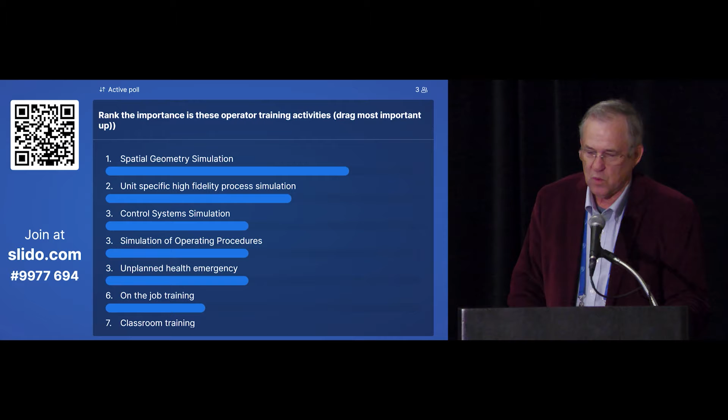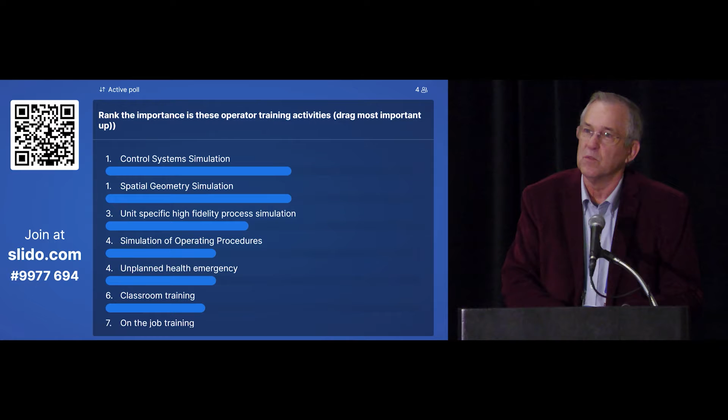In our operator training simulation research work, we kind of broke the simulation types into the simulation of the process, with various levels of fidelity, all right? Anyone that's ever built mathematical models of processes has this rule of thumb: all models are wrong, some are useful, all right? So you can get to very, very high precision. In some cases, that's justified. A lot of the oil refineries and especially brand new process units certainly like to have a high resolution process simulation. But then there's the simulation of the control system.

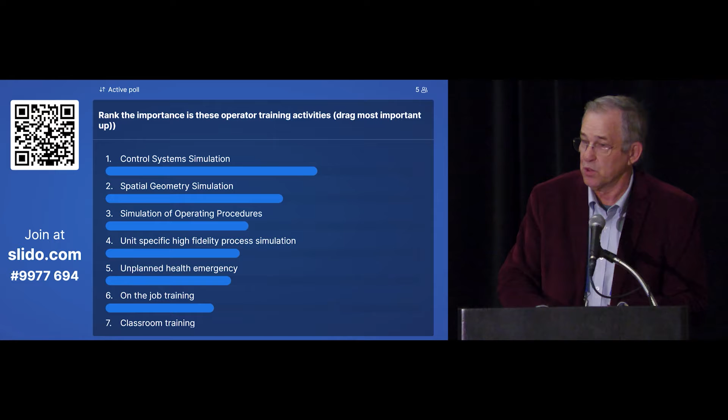You know, in some cases, you could actually connect the actual control system to a simulator. So that's a very precise simulator because it is the same one. Or it could actually be different hardware with exact software running. So it's a replica control system.

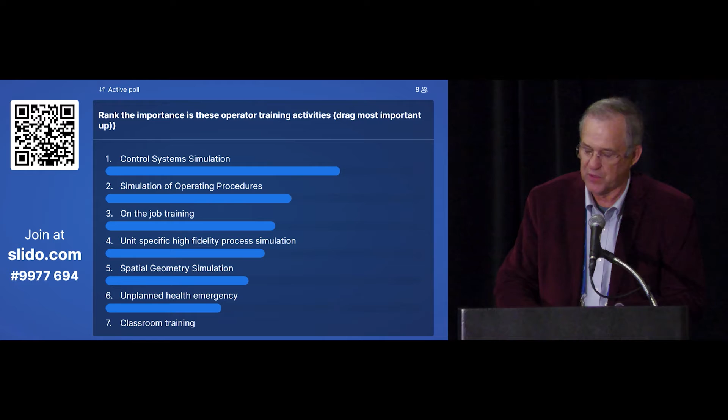And then there is also the simulation of the spatial geometry of the manufacturing plant. All right. And there's some very creative ways that that's done. And in fact, we have some very interesting possibilities of how that's going to work with our esteemed panelists today.

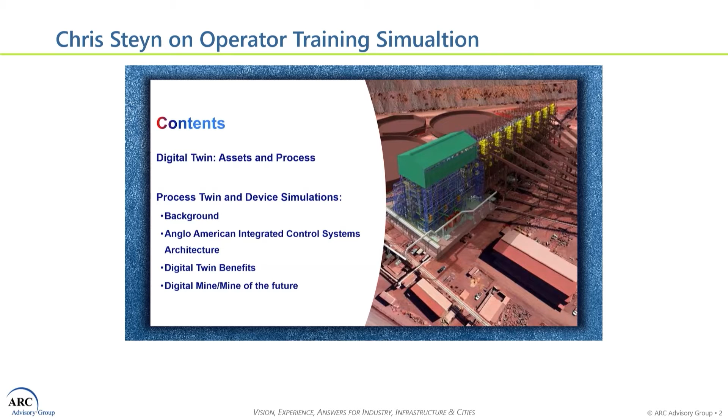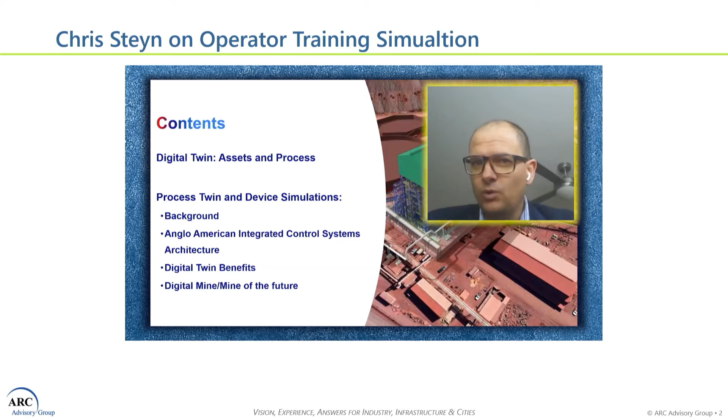So the contents of the presentation: what we'll be doing is just a quick introduction to what we consider digital twin. It is a term that has been thrown around quite often, and it does mean different things for different people. So we just kind of nail that down for what Anglo is all about. Then we'll get into the meat of the presentation. We'll go into the background from an Anglo-American point of view, and then we'll go into the architecture. We'll discuss the benefits of these digital twins, and then we'll just have a quick peek at what's next and what Anglo is really looking for in the future.

Okay, so what is a digital twin? So a digital twin, just in broad terms, if I may read off the slide, it's just an asset that provides a virtual replica capable of simulating all important characteristics of the physical environment. Nothing new to the audience there. In the environment, designers, operators, and engineers can accurately obtain the results of an improvement through simulation. There's absolutely nothing new there.

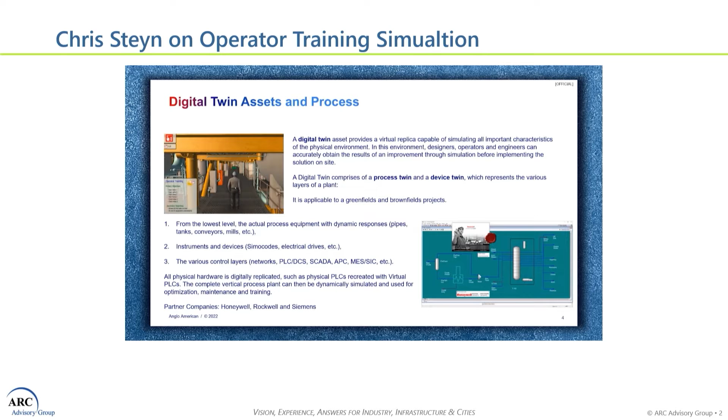However, what I would like to add, for Anglo-American, the digital twin comprises of two things. It's a process twin and it's a device twin. Now, I will be referring to these quite often in the presentation. And we are trying to represent the various layers of the plant's control system hierarchy. And very often we are asked, is this for new plants? No, it is applicable to both greenfields and brownfields projects.

So our digital twin is defined from the lowest level, the actual equipment, the dynamic responses, the pipes, the tanks, the conveyors, the flow rates, the densities. On top of that, we have the instruments and devices, like the SIMOCODEs, the drives, the instrumentation, the actual things in the field. And on top of that, we have our virtual layers, which typically starts with the PLC or the DCS, the SCADAs, the advanced process control, the manufacturing execution systems, or the short interval control, and all the advanced layers on top of it.

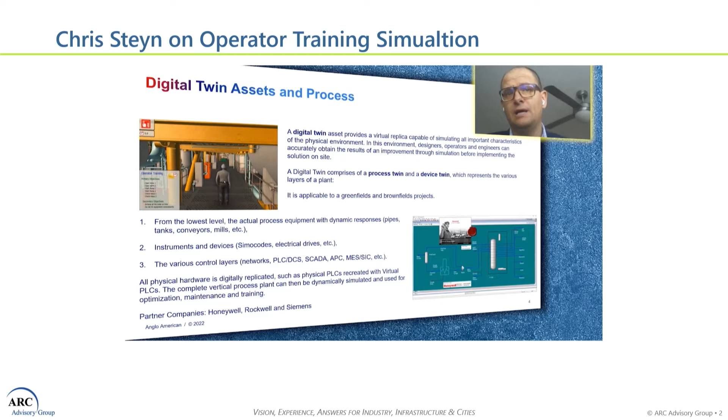All physical hardware is digitally replicated. We'll be talking about that, such as the physical PLCs becomes a virtual PLC, and the actual plant becomes a virtual plant. Our partner company for this is Honeywell. We use Rockwell and Siemens PLCs also fairly widely.

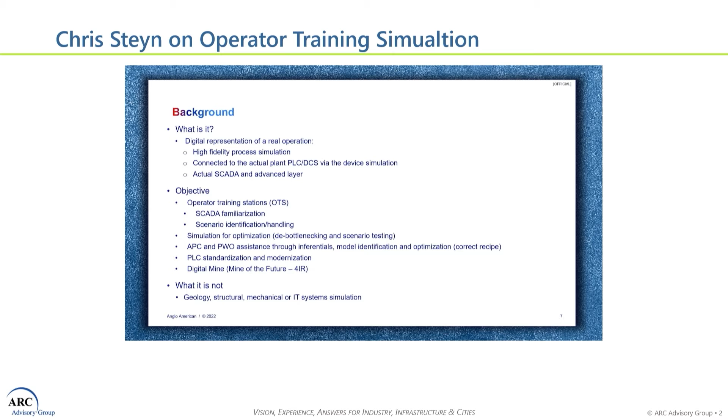Okay, so in terms of the background and getting into the meat of the presentation, there is a bit of repeat here, and we find it fairly useful especially when we are presenting this to our stakeholders on the plant. So what is it? What is a digital twin? It is a digital representation of the real operation, as we've said, but it entails a high fidelity process simulation, which is connected to the PLCs and the DCS via that device simulation.

And then what you have, you can put an operator in front of an actual SCADA that is connected to the actual advanced layer on site. And you can immediately see the benefit that alone will have on any simulation. So the objective is, first of all, to have an operator training station, like I mentioned, putting operators in front of a plant that looks, feels, and reacts as a plant. And it's got the actual control system connected to it for these operators to play with and to fail on that level.

Okay, so that enables SCADA familiarization, scenario identification. In addition, you also have a simulation for optimization, which on its own speaks for itself. It's useful in debottlenecking studies and scenario testing. We've got advanced process control and what we call the plant-wide optimizer. I know in the Honeywell world that's more referred to as the DQP. We have assistance for the advanced layer through the use of inferentials, using the Honeywell design suite, model identification and optimization, running a digital twin in parallel.

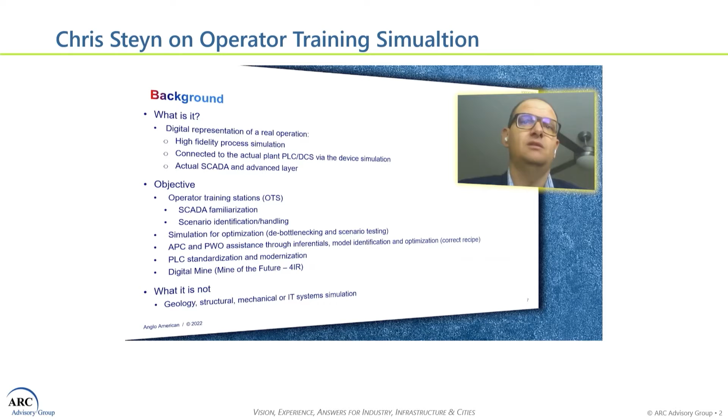What is it not? And it's something we often ask. So it's nothing to do with the geological model of the plant and the feed. It's not structural, it's not mechanical, and it does not include the IT systems infrastructure.

Okay, so Anglo uses an ISA or S88 structure, which is comprised of five levels. Level 0 is the actual plant, mining, the logistics. Level 1 is the instruments, devices, equipment, like I mentioned. Level 2: part of level 2 is the actual PLCs, and the other part is the software, which comprises the sequences, the PID, the control, the base layer control algorithm.

Level 3, which is typically at an execution of between 10 seconds to 30 minutes, is your advanced control. We standardized on the Honeywell Profit software. We still call it Profit. I believe it's moved on to Honeywell Forge. Level 4, we've got plant-wide optimization, where we use the Honeywell DQP for that layer.

Now, on top of that, it's just digital. It's all control layers. It's all in a computer. So part of my job is then to make that physical world bit a digital world. And how do we do it? Just zooming into those couple of layers, we have level 0, which is the actual plant. We use UniSim Design, the UniSim design platform, to create a high fidelity simulation.

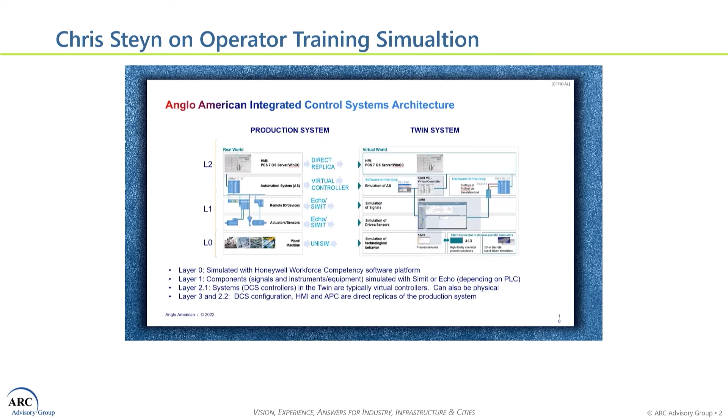The software is a direct replica, and you can immediately see, if you can have a direct replica of the HMI and the actual PLC, you can have a system where you put an operator in front of it and it reacts, and that's connected ultimately to a high fidelity simulation in the Honeywell design platform, reacting like the plant does using the actual control system.

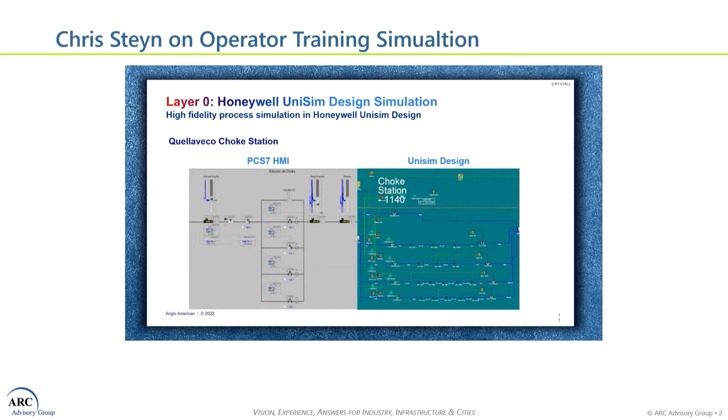Okay, just delving a little bit into these layers. Level 0, as I said, is our high fidelity layer of the plant, the Honeywell UniSim Design. There's an interesting story at Quellaveco. It's a huge copper mine in Peru that's being commissioned at the moment. During the commissioning phase, there was a really good story where we had a look at the choke station, and we could not make this choke station work using UniSim Design.

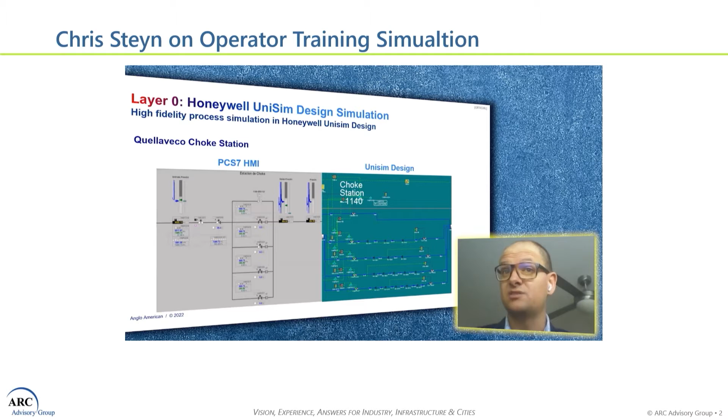And we had the experts in, we had everyone. Ultimately, it was found that the design was flawed, and it caused us to change the design. The OEM came back to us after several heated discussions and admitted that the design was flawed. But it was a great success story for the UniSim Design platform that pointed out, before the plant was built, that there's a fault in the design, which would have caused us quite a lot of downtime during commissioning.

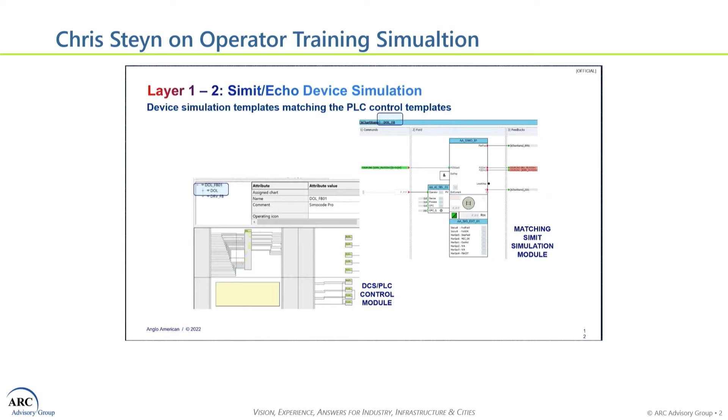Okay, not much to see. Level 1 and 2, it's SIMIT / Echo. It's Rockwell and Siemens software connecting to the PLC. It's just some examples of how it looked. Now let's have a look at the benefit of these systems. Obviously, one of them is you have a dynamic simulation. You can use it for case studies, scenario studies. The example on the screen is where we tested a crusher section.

Again, the benefit I would like to reiterate is that often we do dynamic simulations, but they're not connected to the control system. So in our simulations, the plant doesn't trip because the control system is not there. It doesn't optimize similar to what it would have done. So it's that extra layer of reality that is brought, and we could test various blasting alterations of the mine, control alternatives. We used different configurations of the bins, different crusher settings, and ultimately we decided on a combination of the pre-mentioned strategies, and we went on to implementation based on that.

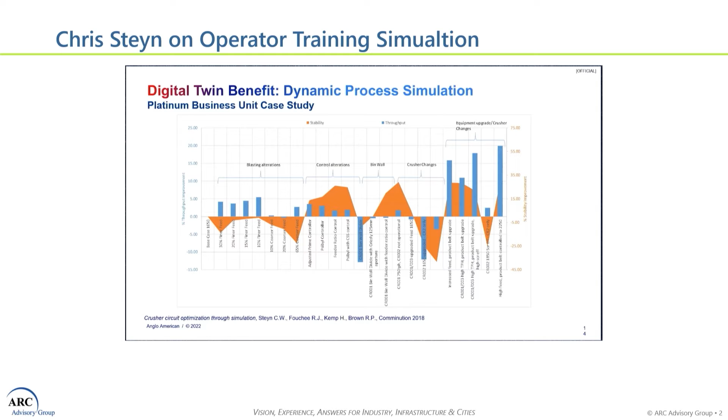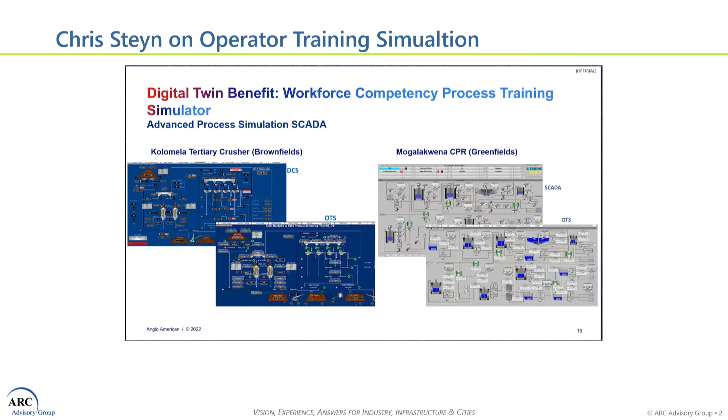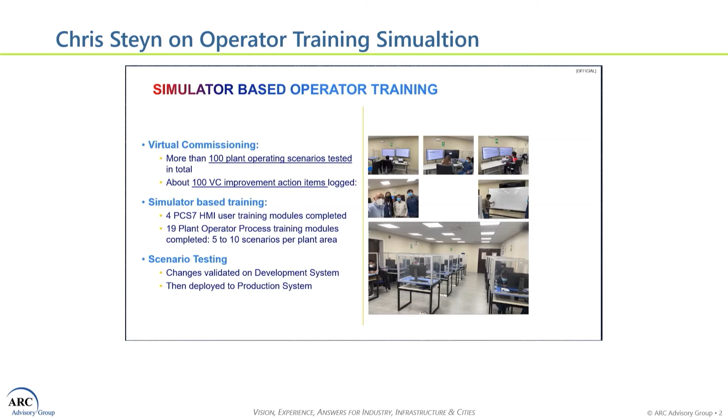Okay, and we also use it for scenario training, where we wanted to teach them how to start up a plant, stop a plant, change a pump, all of those things.

Okay, then just lastly, on the benefits, I just quickly want to go into one of the things we found with virtual commissioning, where we virtually commissioned the plant's control system. Typically at Minas Rio, one of our other plants, we received the code from the vendor, which in this case was a Rockwell vendor. And typically what you'd see, this is nothing against Rockwell, is when we get the factory acceptance test software, we skip a virtual commissioning and training step. We go straight into loop checking, training based on a static SCADA, and ultimately we go into wet commissioning.

However, at Quellaveco, with this entire digital twin, of which Honeywell has got a couple of products featuring, we included a virtual commissioning and training. So before we go to loop checking, we've already done the training on the SCADA. We've done a virtual commissioning of the software, both the PLC and the advanced layer software, and only then do we go into wet commissioning.

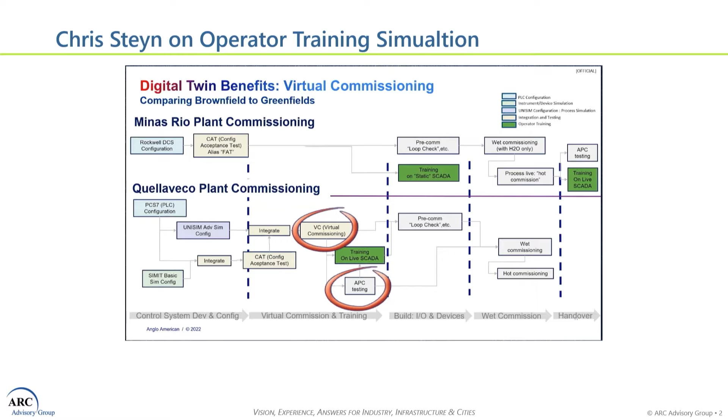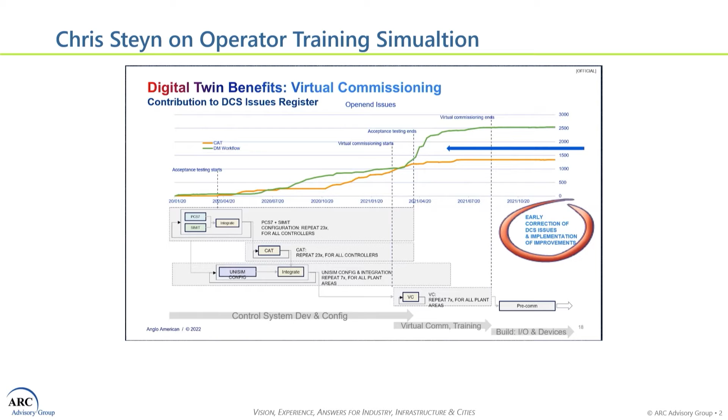However, during a period where there was a virtual commissioning at Quellaveco, but nothing at Minas Rio, the virtual commissioning spotted an additional 1,000 to 1,500 issues with the control system as was delivered to site. So you can imagine having 1,500 issues during wet commissioning that you have to sift through. It just puts an amazing strain on the commissioning process. And obviously what we've seen now is a reduction in the commissioning time, which is something we're really proud of.

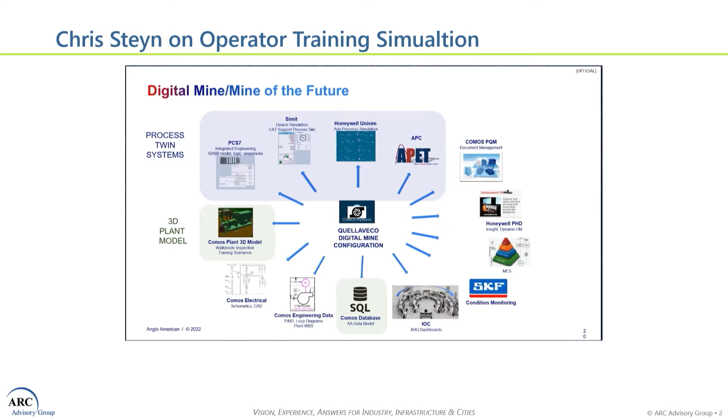Lastly, we're heading towards a digital mine where any piece of equipment, let's for instance say a pump, is connected to a simulation. It's connected to our advanced suite of software. You can get all this information in the virtual world. Then we would like to connect it to a 3D plant, which we're busy doing. We're using a document management software called Comos. It's also another product, but that gives you the electrical drawings, the instrumentation diagrams, and all sorts of information while you are navigating this plant in the digital world.

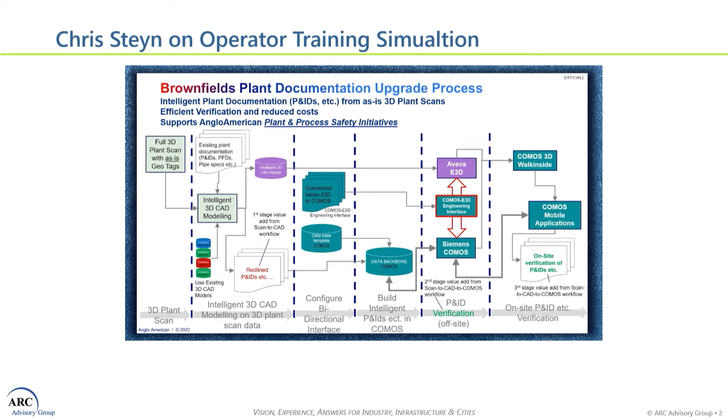That's what we're doing at the moment, doing some 3D plant scanning. From the 3D plant scanning, we suck in the old P&IDs, which in some cases are hand-drawn. It's difficult in those cases, but ultimately using the 3D plant scans that we are taking, we are delivering online P&IDs, red line P&IDs, using these 3D environments. And ultimately, we would like a completely virtual environment where you can walk around and get all the engineering information from our document database.

That's just a little bit on where we're heading, and of this, the Honeywell suite of software does really come into play, where all of this is connected ultimately to a process simulation, which is driven with a high fidelity nature from the UniSim Design environment.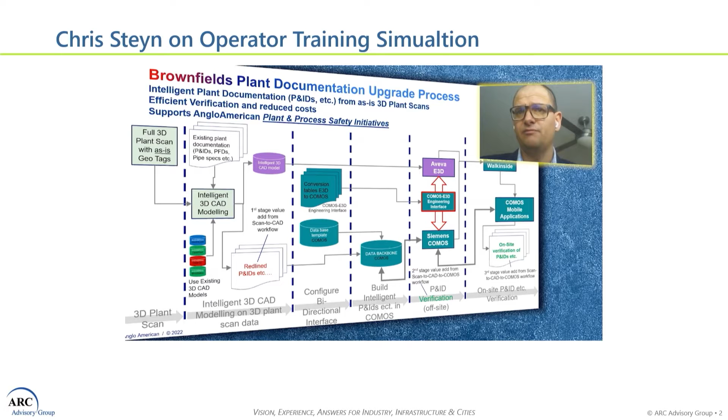Today I'm going to talk a little bit about what BASF is doing to enhance their operator training program, utilizing digitalization. So first I want to talk just a little bit about BASF, give you a little bit of background. So again, I'm from Geismar, Louisiana. We have approximately 1,300 employees with about 1,000 contractors. We have 2,300 acres at our site in Geismar.

Also, the sports arena. BASF plays a big part in the sports arena. From the footwear to the helmets to the turf that everyone walks on, plays on, BASF chemicals plays a big part in all of these. So a little bit about that, about BASF.

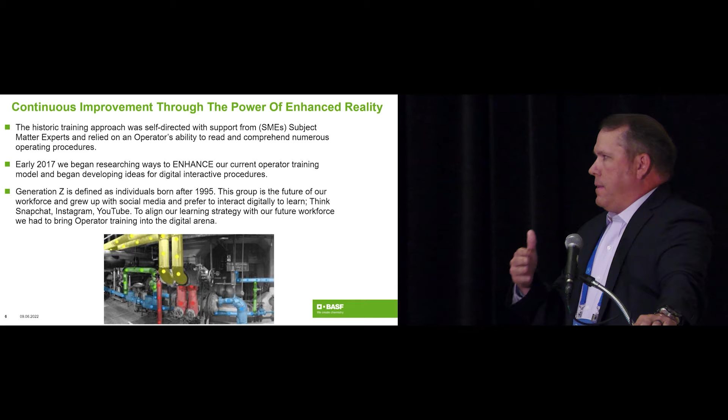So when you go out and buy something, and I've heard this a couple of times during the conference, you never read the manual. The manual's confusing, leaves a lot of interpretation. What do you do? You Google it. You go to YouTube. I do it all the time because it's very specific to what I want to see and do. So again, this is the same principle that we're trying to transition to in the manufacturing community.

Okay, so let's talk a little bit about some of the challenges. These aren't new challenges for the manufacturing community. I mean, these are always top priorities. EHS. What EHS enhancements do we see with bringing in digitalization? How can digitalization tie in with EHS?

Equipment reliability. It's very important that our equipment runs. So how do we train our employees to where they're starting up equipment safely, shutting it down safely, so they're not damaging the equipment, and they're not in harm's way? Process safety compliance, this is big.

Process safety. How do we ensure with our training that operators have the competency? And if they don't have the competency, how are we doing training remediation? So how do we remediate when they're not meeting the competency level that we need? And that's not only on refresher training, but also on initial training. New hire onboarding. So how can we lift our new hire onboarding with digitalization?

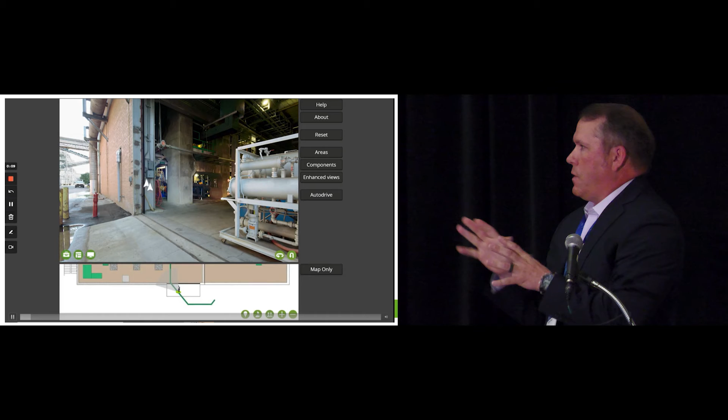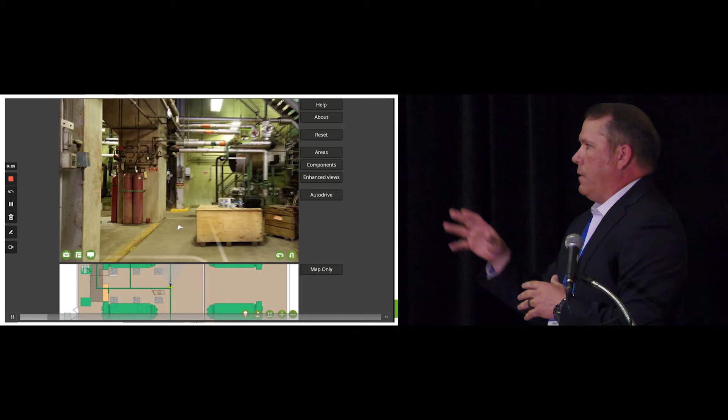Okay, so we're going to look at a little demo here, and we'll run through it. I'm going to talk quick as we walk through it. Okay, so this is the digital replica. This is JPEG pictures that have been stitched together that allows you to smoothly just walk through your process. So as you walk through your process, you can look at the different pieces of equipment. You can look up, you can look down, you can do a 360 look around.

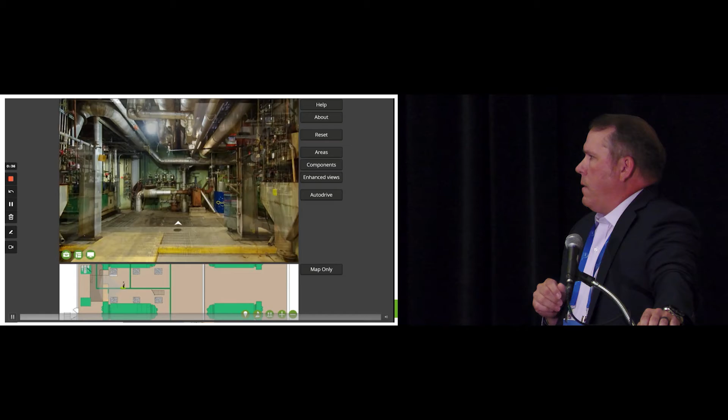Also, once we get into right here, you can see the green boxes. So the green boxes, when you hover over it, it tells you exactly what it is. So then when you click on it, it'll give you a blown up view, and then you can kind of interact with the valve. So this is where Vuvio is unique. You can actually interact with your equipment through the simulation. And again, a lot of the newer operators, this is what they're looking for. This is what they want.

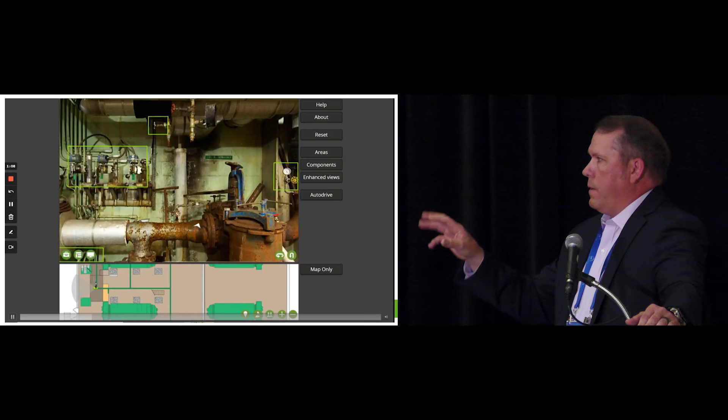And then we also catalog all of our components. So if you want to see a specific component, you can search for it. You can put a generalized verbiage up there. You find it, click on it. It takes you straight to that component. So great piece there.

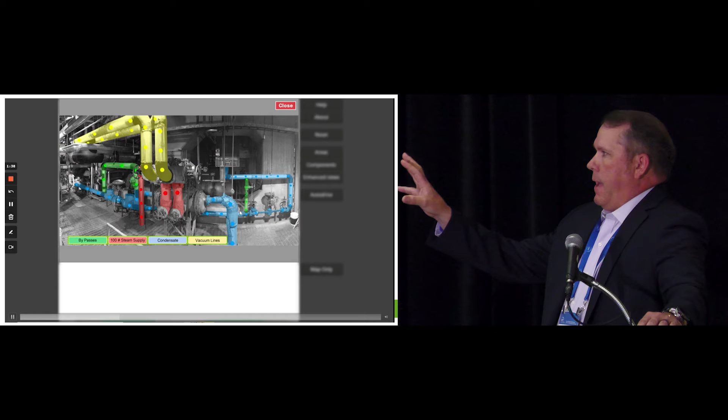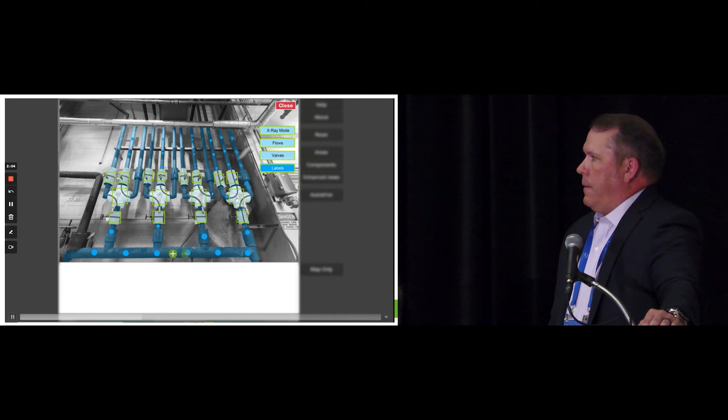So this is some of the enhanced views that I was talking about. So you can see the flows through the pipes. You can start the different flows. This is a more complicated manifold here. So you can see how the valves are activated. You can put labels on them. And then you can practice doing lineups. So if we're trying to get one product to one tank or whatever, we can play with these in the simulation.

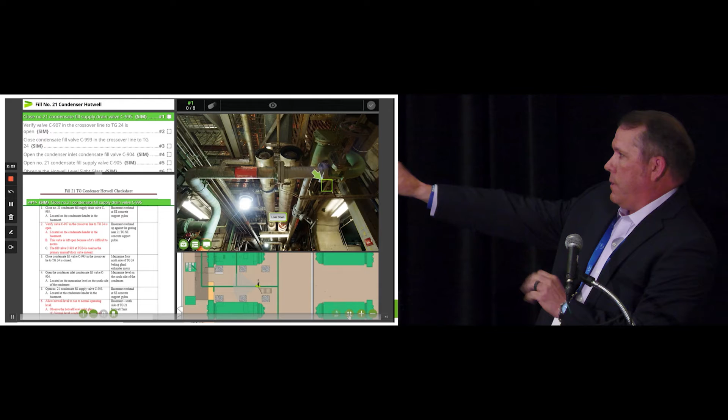All right, so let's go into, so this is the procedure simulator. So if you look, that's the replica on the right. We have a map that's on the bottom. We have our procedure on the left. And then at the top, you can see there's an action checklist. So this action checklist is what we're actually going to go through.

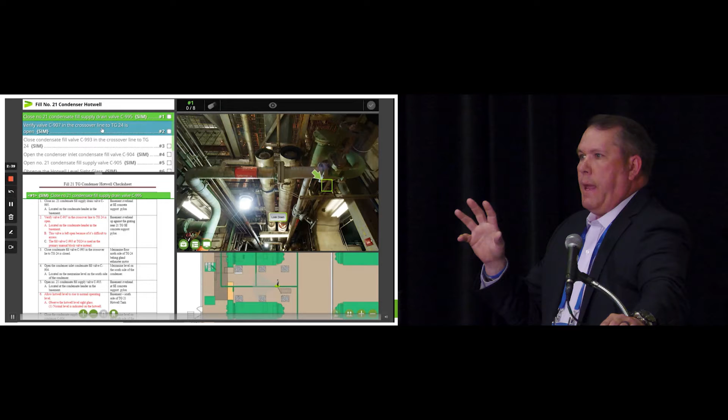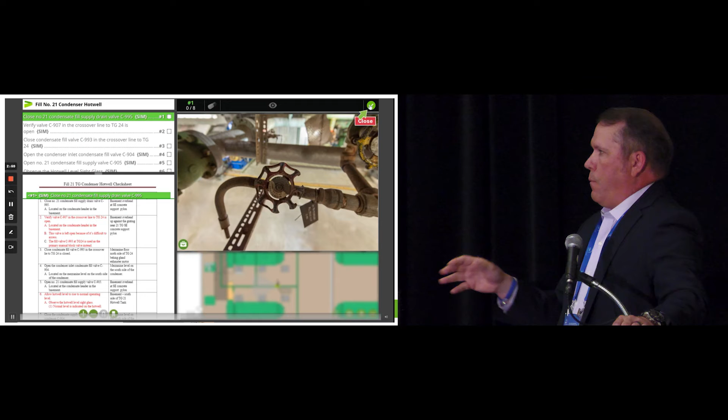So in a procedure, you may have one step in a procedure, but it may have 5 to 10 actions. So we pull those actions out of that procedure and we put them in that action checklist. So it may say, we're going to close all bleeds on the pump. Okay, well, we're going to pull those out. We're going to say we're going to close bleed 1, bleed 2, bleed 3, and so on.

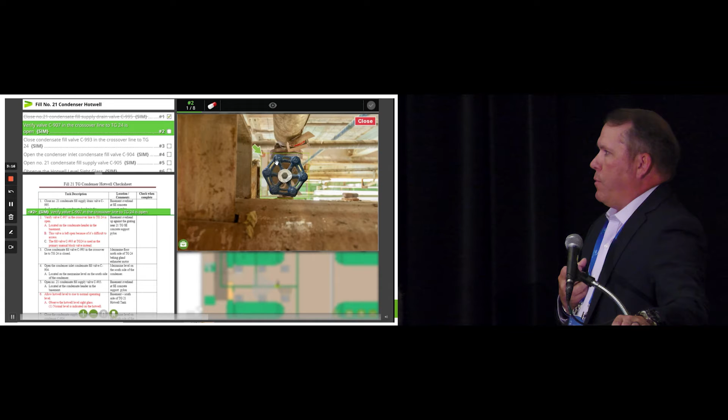But you'll notice as we go through these, you're actually going through the procedure, you're performing the action, then you'll have a knowledge snippet. Again, organizational knowledge transfer right here. So if there's something important that needs to go in here, we've done videos, we've done text, a great option to pull some of that knowledge from operators that know something about this piece of equipment.

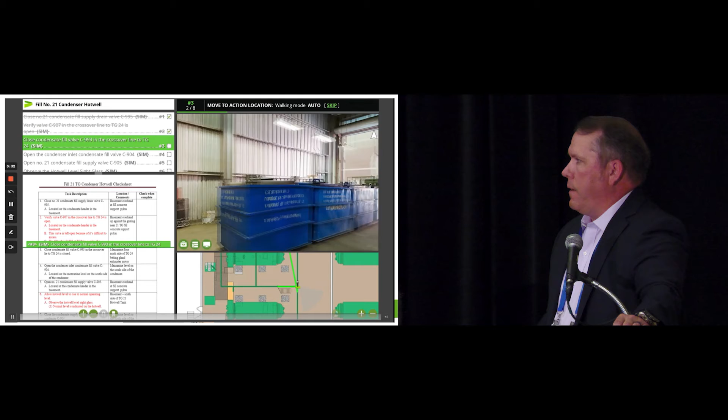And you'll notice, since this is the guided, it's automatically going to walk that operator to the next component that we're going to have to operate. So again, teaching the operator where these components are.

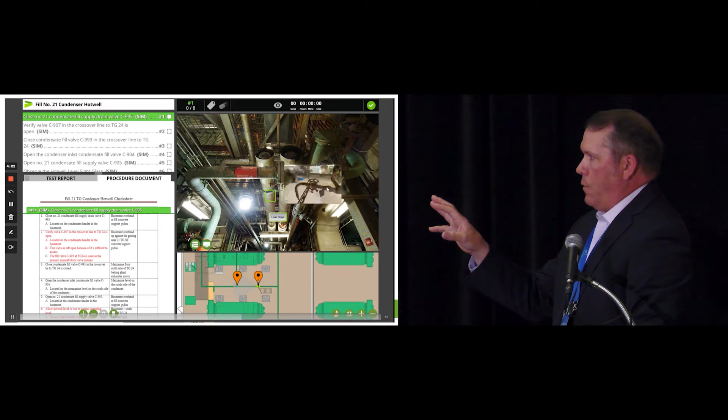This is the test simulator. Again, it looks similar, except that operator has to walk around, has to know where the components are, has to know what he's doing, and you can see you're getting instant feedback here. So it said, okay, I closed the correct valve.

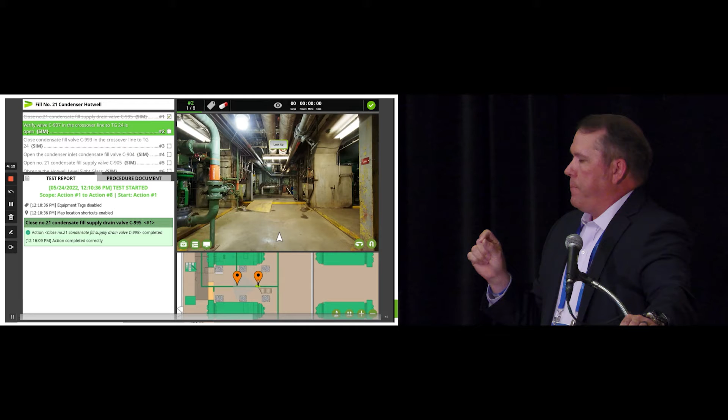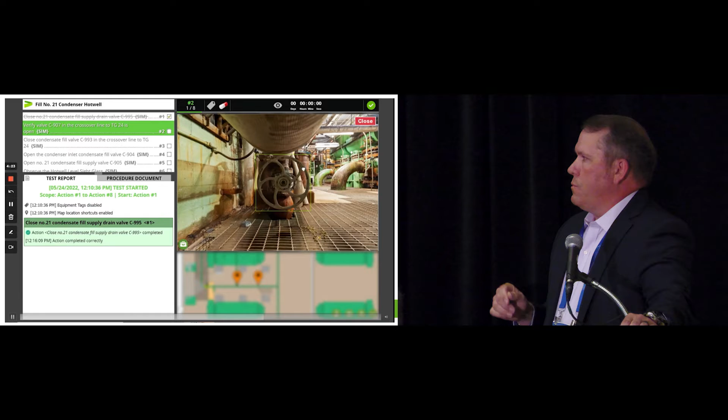All right, so he has to find the next step, and this one we'll show you if we could complete it incorrectly. So we'll close or open the wrong valve, and instantly he knows, okay, I made a mistake. I opened this valve, I should have opened this valve. And you'll see at the bottom, you can go back, you can review, or you can try again. The review will take you back to the guided and let you review.

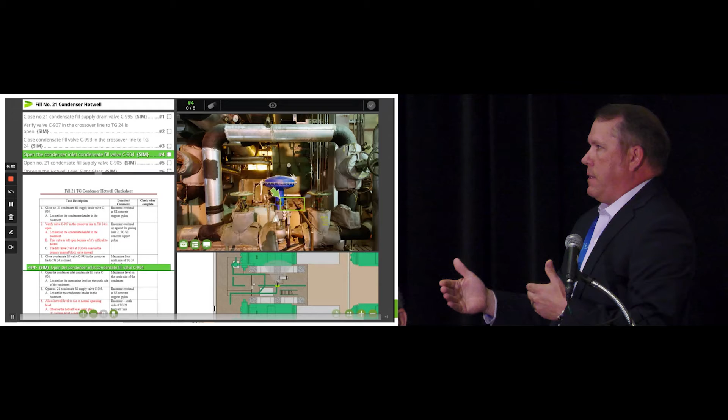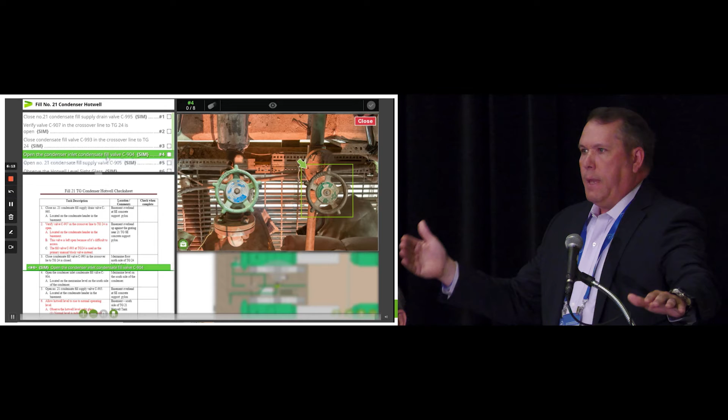So you can see, there's 2 valves right side by side. They look identical. So they've opened the wrong one in the test. So again, remediation. So now I can go back. I can sit down with those 3 operators, and I can say, okay, well, let's look at step 4. You're having problems here. All right? So again, a great tool, and again, remediation. This is how we're making sure that our operators are competent, okay?

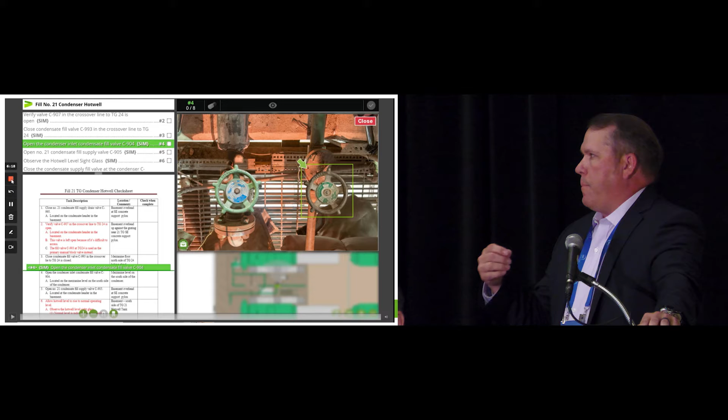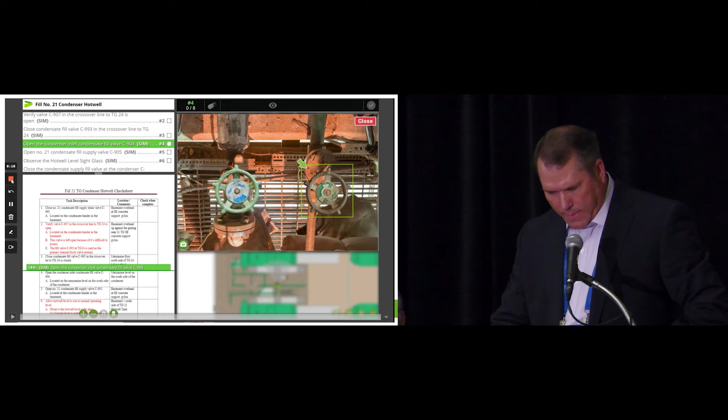All right. And that was it. All right. Okay, now, let me finish up here.